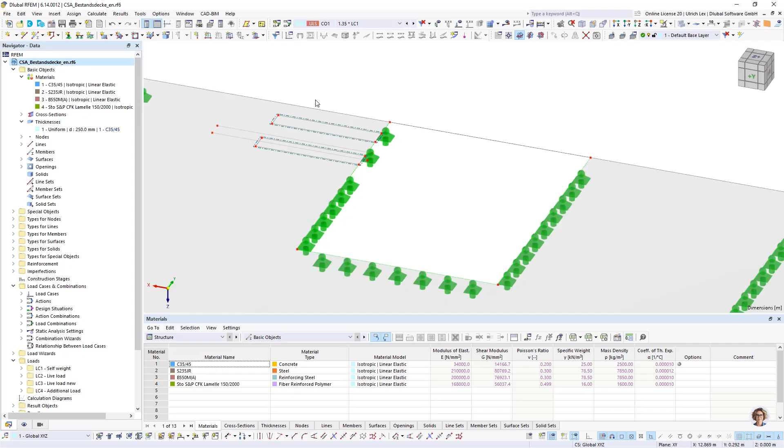Why did I do this? It's because in the second state we want to have an opening here, so I can take off this surface. But at the beginning, I have to create an opening and fill it with a separate surface, and the same here in the front.

The same is true with the supports. In the first state it's point supported with nodal supports, and in the second state there will be a line support here, like a wall or something else. So that means for the beginning we have to model both in one system, and later on we will decide which support is acting in which state.

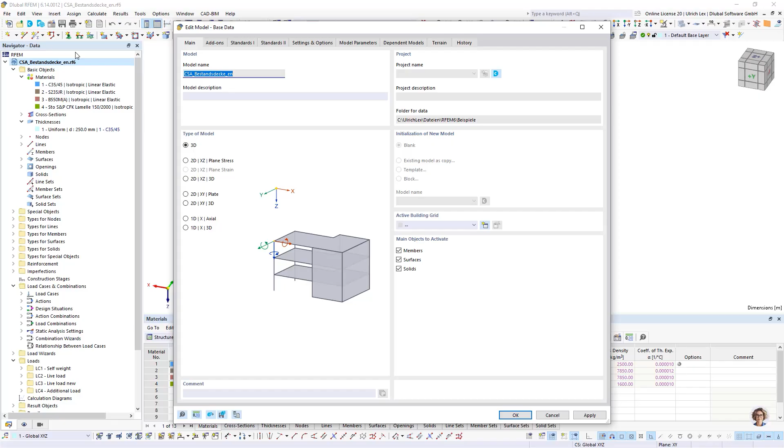Okay, the second thing is the loading. I created some load cases already. What I forgot is, at the beginning I want to take a look at the base data. For today's job we have activated different add-ons. The most important is the construction stage analysis add-on, and additionally I created the concrete design, the steel design, and the stress-strain analysis as well.

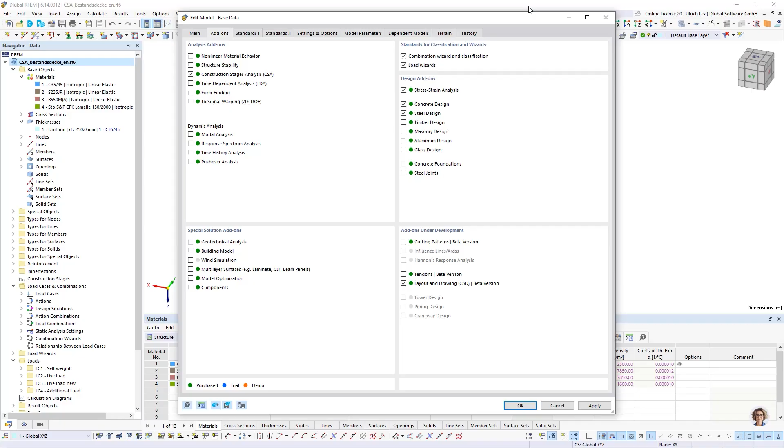For the additional tabs I did not change anything, so the settings are by default. Okay, so then we can continue with the system. There is a loading that is created. I created some load cases: at the first stage, the self-weight.

Here it's up to you how many load cases you create. In my case, the self-weight will be the same in the first stage and the second stage, so it's enough to have one load case. If the load is different between the different stages, then it would be necessary to have more than one load case, also for the self-weight.

I did this for the live load. I have one load case for the old live load, and an additional load case for the new live load for the new stage, and I created an additional load case for additional loads.

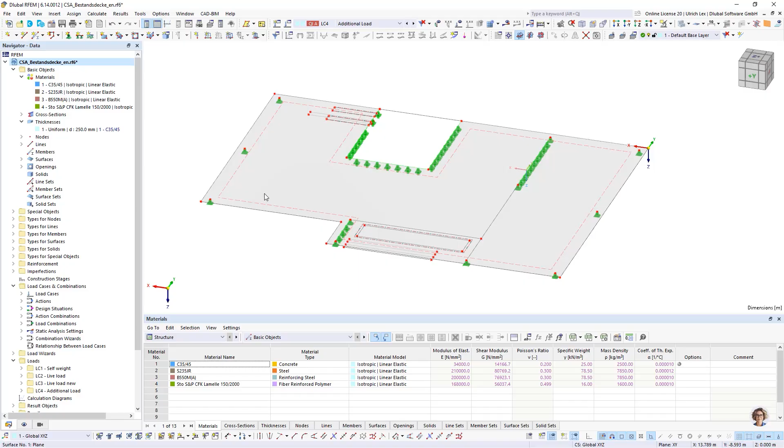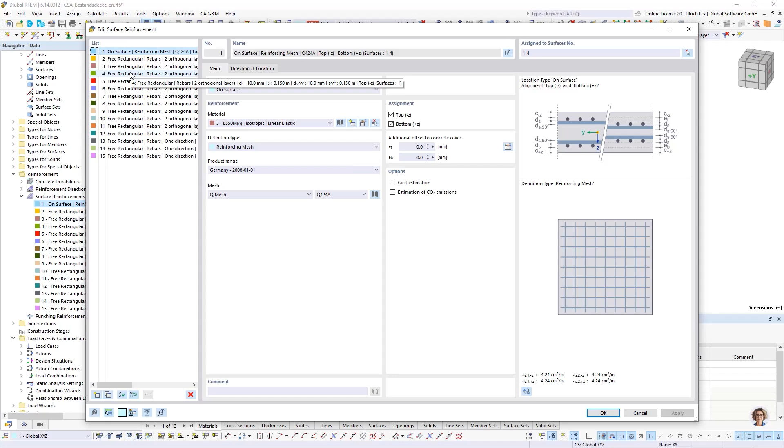Okay, what I did additionally is, in my case, I know the existing reinforcement for the slab. So that's why I wrote this info directly in the program. I created here the surface reinforcement, maybe as a basic reinforcement. It's a mesh Q424, maybe on top and bottom side, and additionally some free reinforcement in the other places. We can also show this reinforcement when we check on the part.

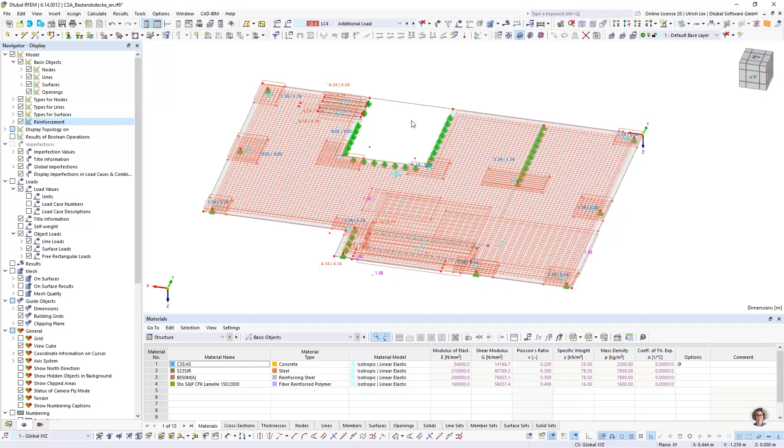This is a thing we don't know for every existing system, but it's not so important. When you know this reinforcement, it's easier, because then you can do the check between the existing and the needed reinforcement. When you do not know it, you have to go one step back and compare the stresses, and decide with the stresses if your reinforcement is okay, is enough or not.

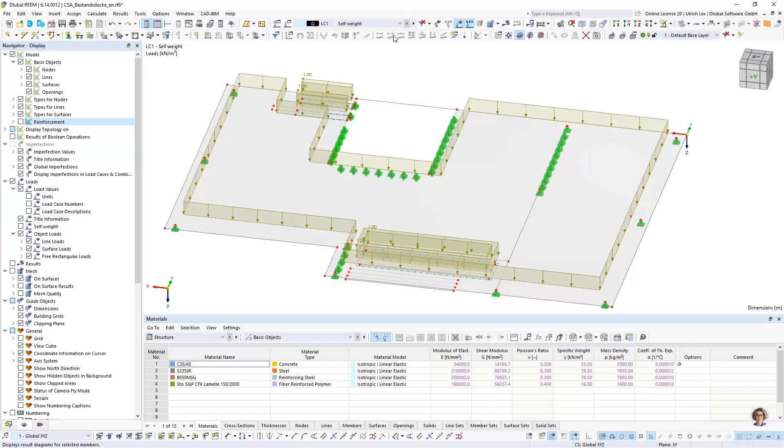Okay, then we can continue with the loads. As I said, we want to change the system in stage 2. We then want to open these openings, and we had a different load. When we take a look at the loads, we have self weight only — these are only example loads, not anything from any code. We have a live load defined with 5 kilonewton per square meter in the old state and the same in the new state, and additionally loads here in the front in the new state.

Okay, then we can continue with defining the different stages. When the add-on is checked on, we have here in the data navigator the option to create a new construction stage. When I do this, I get this new tab. Here I can choose which members, surfaces, solids are acting in our new construction stage.

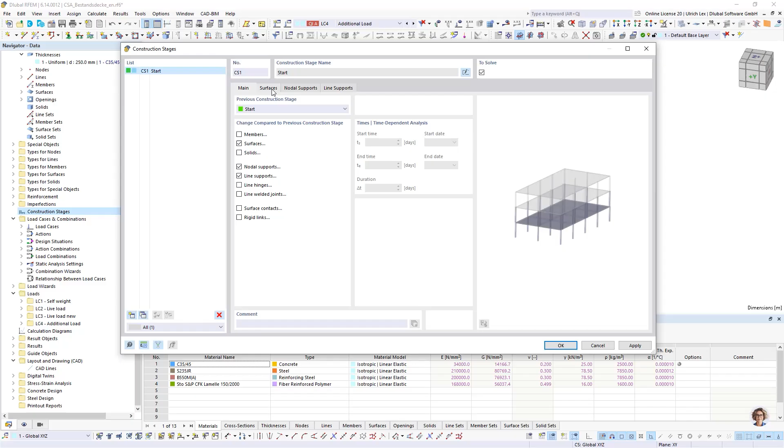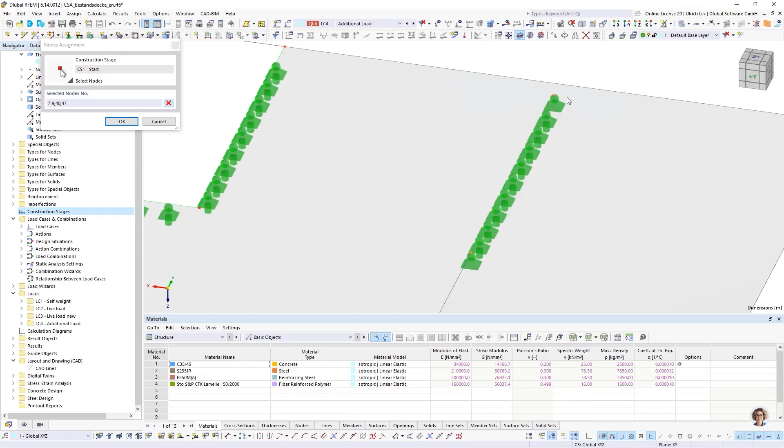So I activate surfaces because we have no members, and I activate nodal supports and line supports. Here I can choose the different surfaces that should be acting in the first stage, and also the nodal supports — I select these because both should be acting in the first stage — and also the line supports.

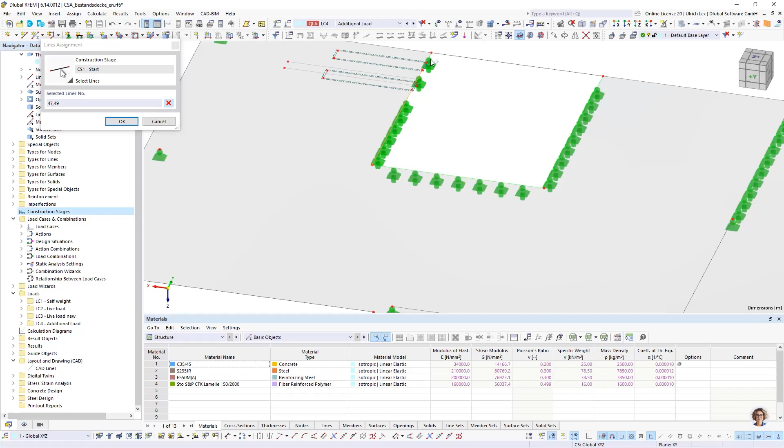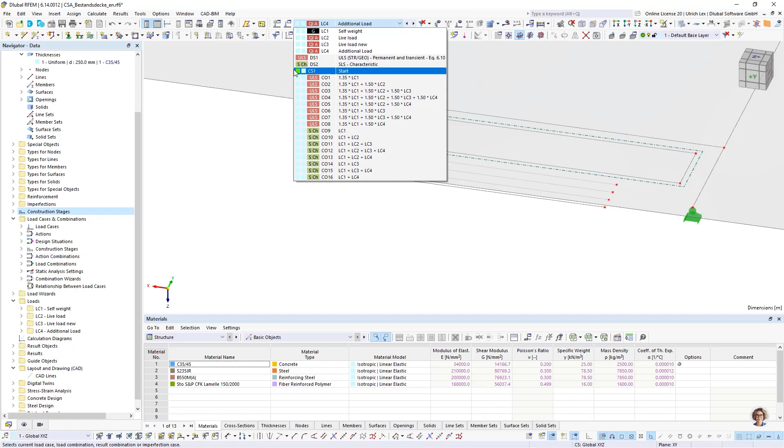Okay, continue with OK. Then we can check it when we go to the load cases and combinations. Here we get one item, construction stage 1. If you choose this, you see all the system as you have defined it. Here we see now only the nodal supports because they are acting at construction stage 1.

So for my second situation, where I want to deactivate the surfaces, I want to create new members as support, and add a member on this line and here, and check afterwards if these members are enough as additional supports in stage 2.

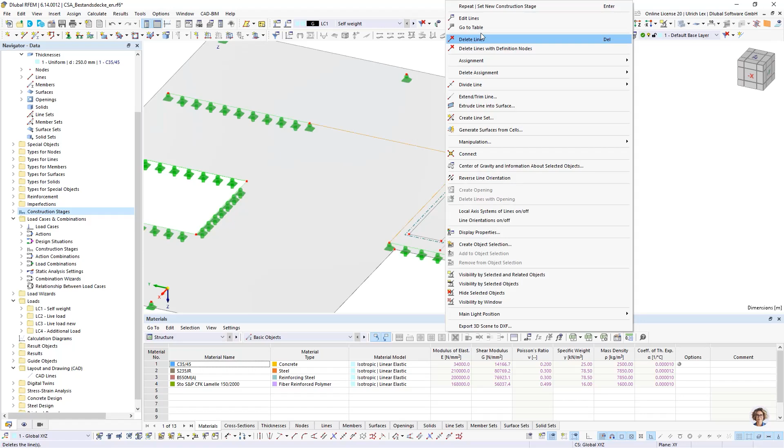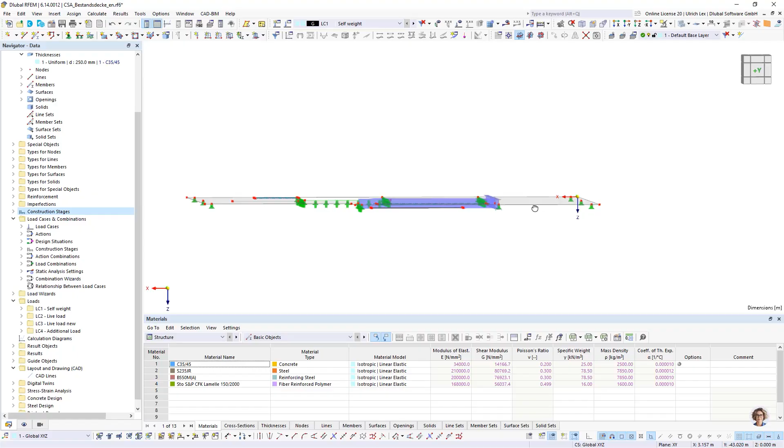So then I can start with the modeling. I choose my lines and edit these lines. I add a member here, choose a cross section, maybe an IPE. Okay, so now it's in the center line. I can change this when I add some eccentricities.

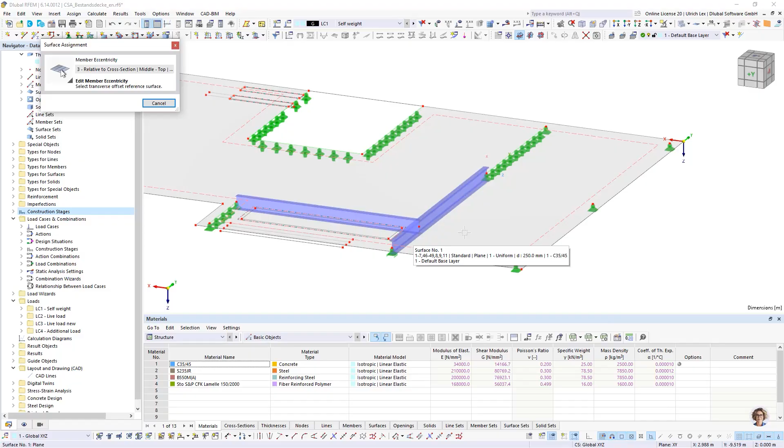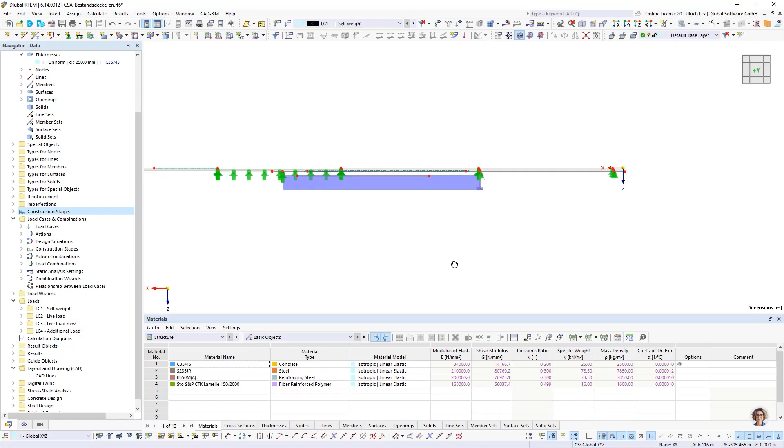It should be acting on the top, transverse to the surface, and this should be on the bottom side, acting on member start and member end. Then it's located on the bottom side of the surface.

So one special thing is, when I create my members in this way, each FE node is connected from the member and from the surface, so we would have big normal forces in the system. When I don't want this, when I want my steel member sliding between the concrete slab and the steel member, then I can add a special object.

It's called line release — I create here a new line release, choose my lines where it should be acting, and create a new line release type. So I only have a small spring constant in the x-axis, and the other forces are fully transferred. I want to release my newly created members, this one and this one, and confirm with OK.

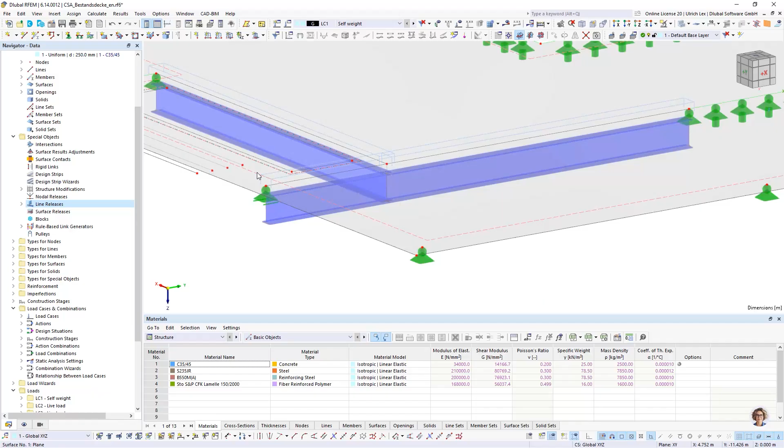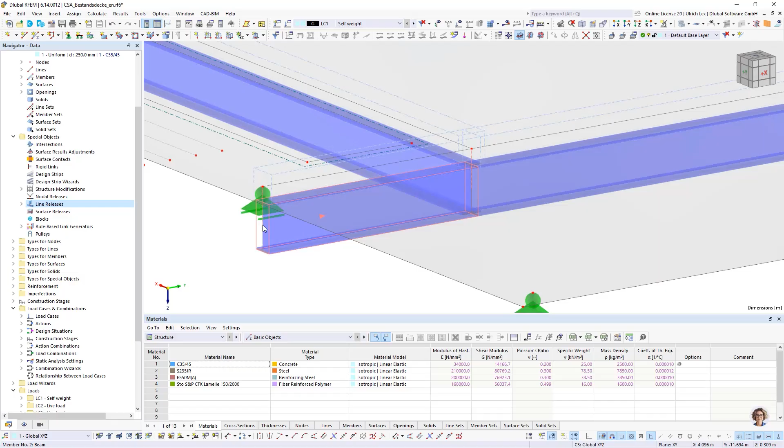So now it's the case that the line release creates new nodes. My surface node is acting as node 41, and the member node is acting as 76. Here I need to be careful, because if I want the support to act in stage 2 on the member node, I have to create an additional nodal support and choose the new node created from the line release.

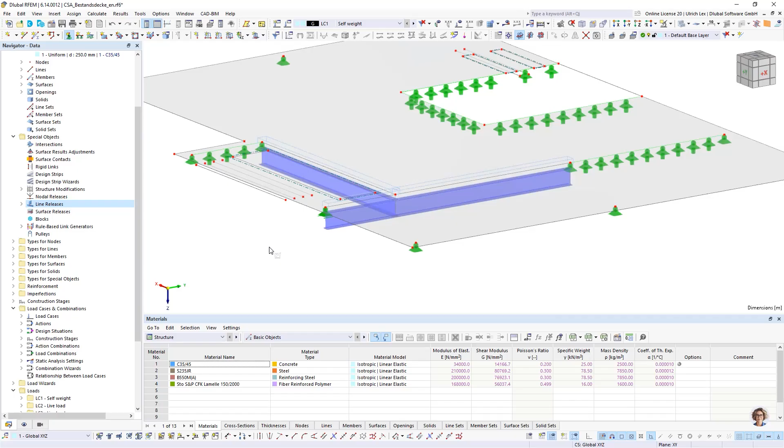So this is all for the moment. Then we can continue with the creation of the stages.

Now I want to create my stage 2. I can create here a new stage. When I do this, I have the option to create a completely new stage where I do not consider any previous stage. I can change here from start, or I can use here a previous stage.

That means the deformations and so on, and the self weight, are transferred from the first stage to the second stage. And also the activated things, surfaces, nodal supports are transferred from stage 1 to stage 2.

In stage 2, I can modify it. I can modify the system in this way. Now here additional members should be acting.

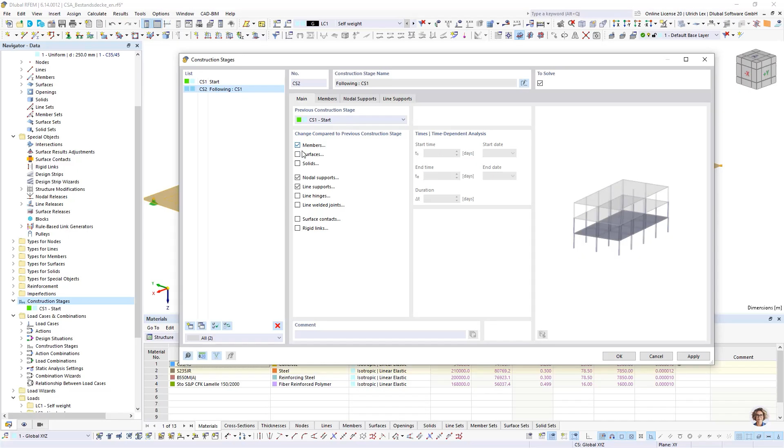I can choose it, 1, 2, 3. Then my surfaces are active 1 till 4. But here I want to have only surface number 1. That's why I can deactivate the other surface. That means I create this opening in stage 2.

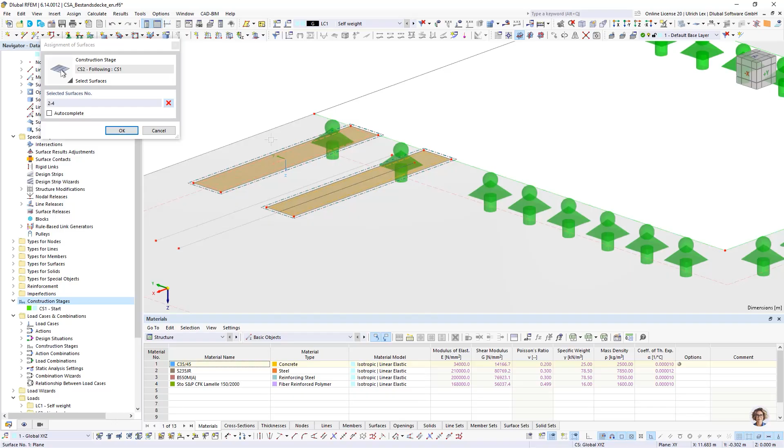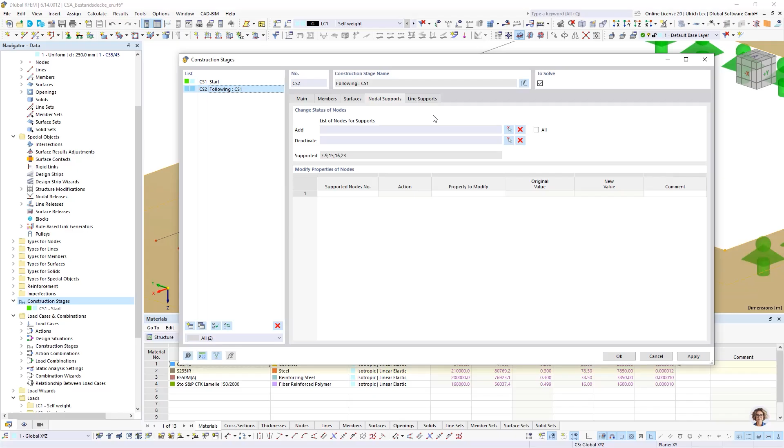I can take a look at the nodal supports. Here nodal support in stage 1, nodal support 41 is acting. And here I can add this nodal support 76.

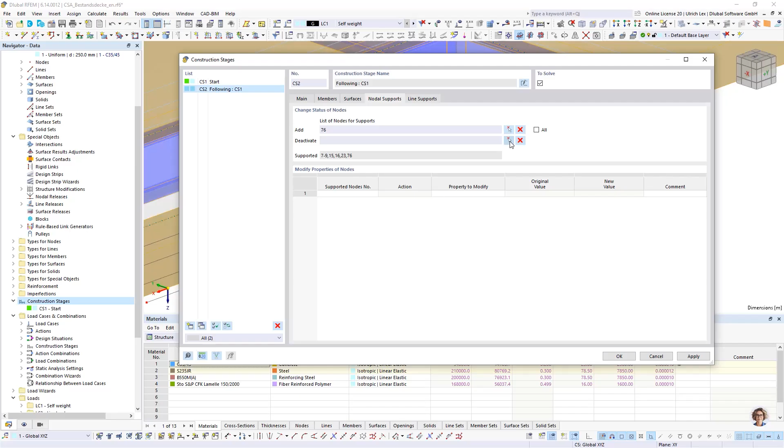And I want to change and deactivate this one and this one, this one and this one, and the 41.

And here I want to add some line supports. I want to add here, because in stage 2 a line support should be acting instead of the nodal supports. And the same here.

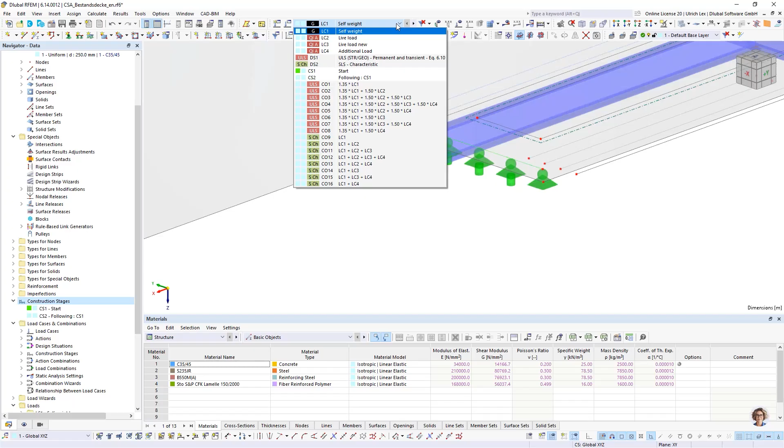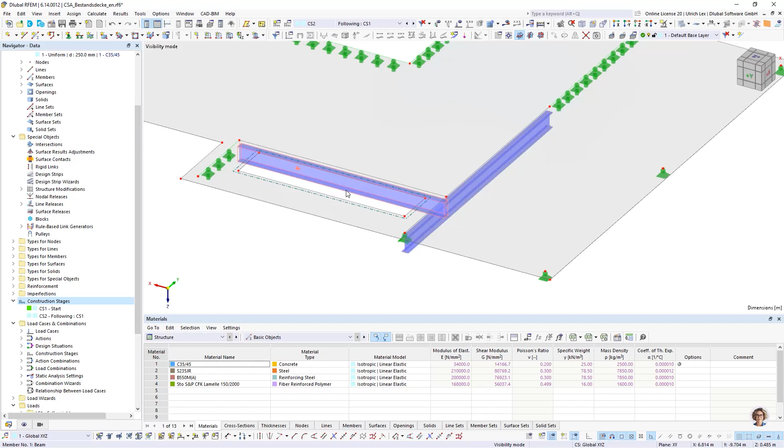So when I continue with OK, I can do the same as before. I can take a look at my stage 1, which I already created before. And in stage 2, I now have my line supports, my steel members, my created openings, and the line support here in the front.

Okay, so when we did this, the different stages are finally created. So the next step we could do is to take a look at the loads.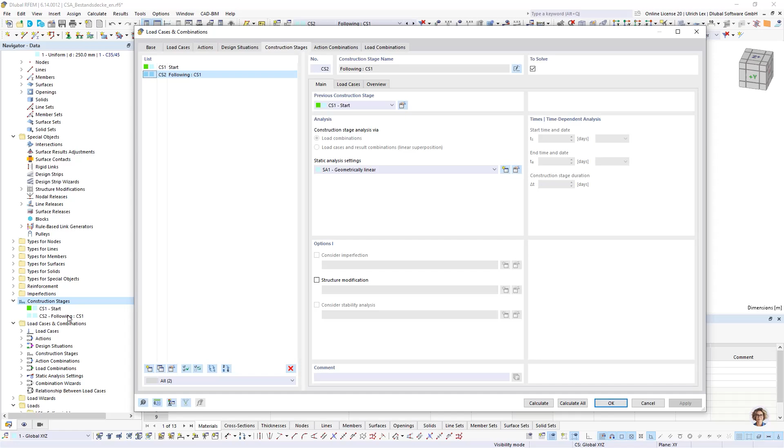Here I can open the load combination and load case dialog. When a construction stage is activated and some stages are created, we have here a new tab, construction stage. Here it's possible to assign different load cases to the different stages. We want to start with stage 1. In stage 1, my self-weight and also the live load in load case 2 are acting.

In stage 2, the self weight should be acting, but not load case 2. Instead, load case 3 and 4 should be acting. And this is all we have to define. We only have to say in which stage which load case should be acting.

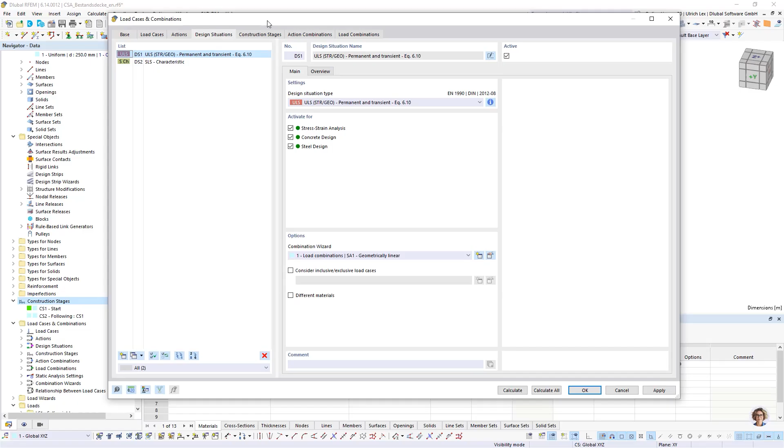So when we continue, we can go to the design situations. Today, for the example, I have only created 2 design situations, one for the ULS and the second for the SLS design. When you want to do all the checks for the different materials, maybe concrete, steel, and so on, you would need more design situations. But today it's more important to show how the construction stage is working, not so much the different checks for the materials. That's why I have only 2.

And now it's possible to assign to these both design situations the different construction stages. Here I can use the combination wizard. When I modify this wizard, I have the option to consider here an initial state.

And here I can choose stage 1. When I do this, we see that the load combinations are created automatically for my design situations, and they are acting in stage 1 only load case 1 and load case 2.

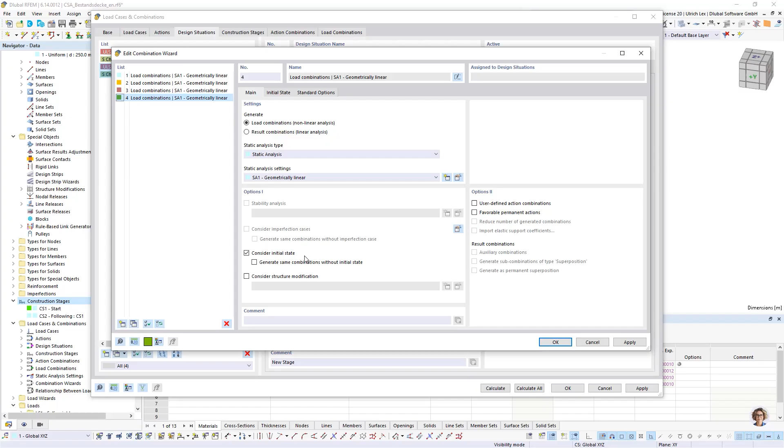I can also say new stage, and here I can say old stage, and now I can modify my wizard. When I copy this again and say my initial state should not be stage 1, it should be stage 2 in this case.

Continue with OK. Assign this wizard to design situation 1 and 2. Then we see that additional combinations are created. The same we had before for stage 1 is now acting for stage 2, and we see here only load case 1 and 3 and 4 are acting.

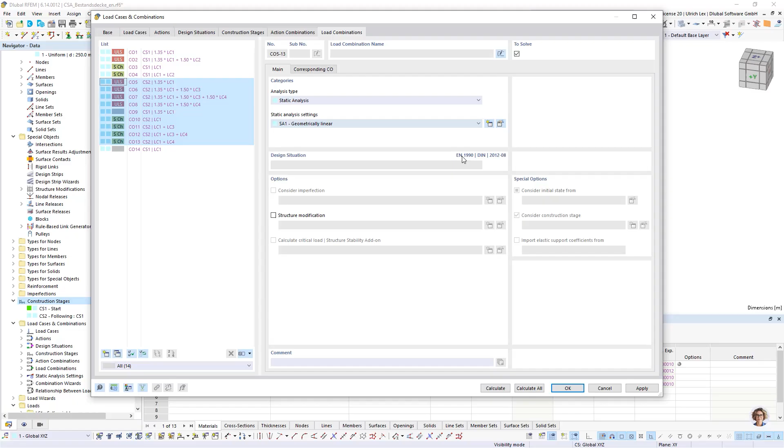So this is the way you can create different combinations for the different stages. When we continue here with OK, my different combinations are created. You can also now check these combinations graphically.

It's so when a stage is considered, then also the objects, the activated objects are displayed. When I switch to combination 2, I see that my nodal supports are acting. And for combination 7, the line support and the members are acting.

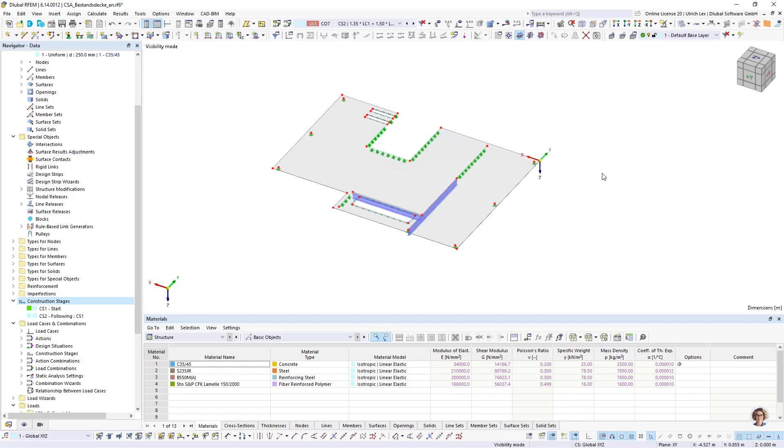So as the last part, we can check the FE mesh. Maybe it's the length of 0.25, it's okay for this case. And then now we can continue with the calculation. Here I can choose calculate all and try to run my first try.

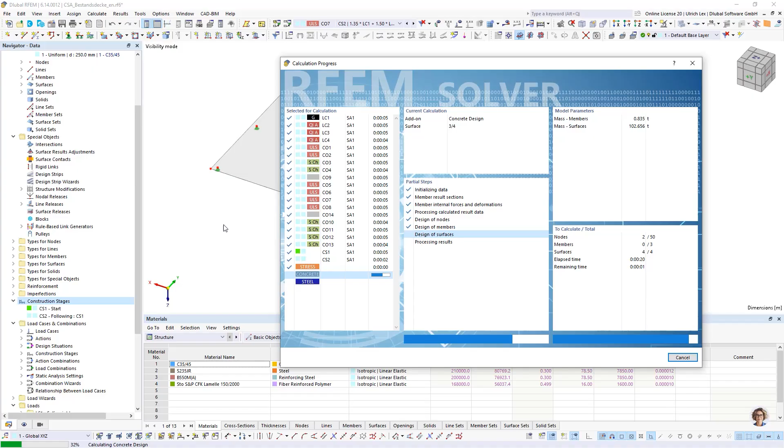As results, we will see that we get 2 result types. On one side the static analyze results, and on the other side the results for the different add-ons. You can choose here one time the static analyze results, and on the other side the results of the different add-ons.

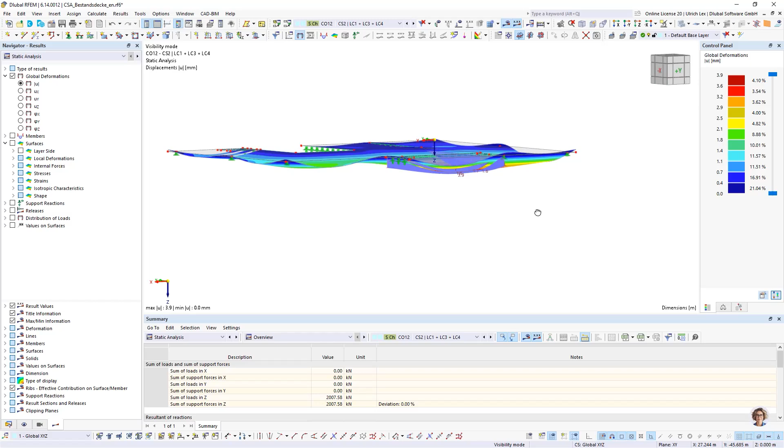When we take a look on the results on the different stages, I can choose here maybe for deformations. In stage 1, we see that the surfaces in the openings are acting. And when I look at stage 2, then also the members are acting. So our input was okay, I would say.

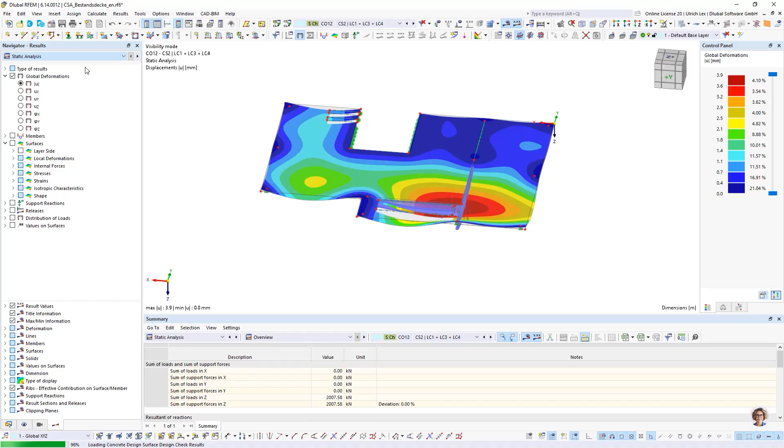For my case, where I defined my reinforcement before, I can check now directly the results of the concrete calculation. Here I can decide which results I want to see. By default is checked the maximum of all selected design situations. Here I can deselect these design situations, and I want to take a look only at stage 1, the old stage.

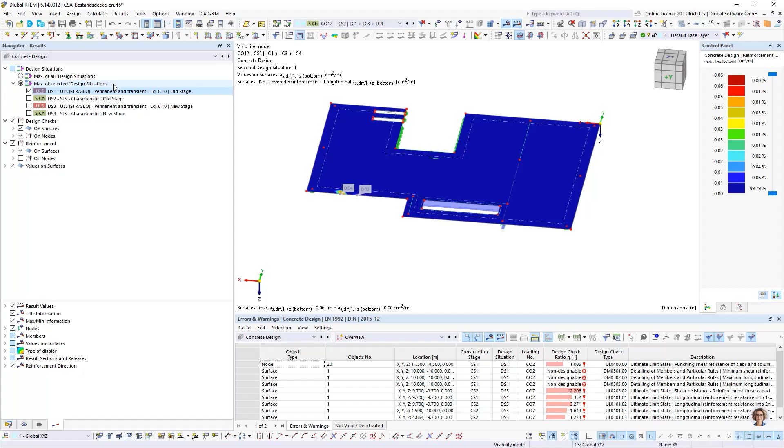For the old stage, when we take a look on the reinforcement on surfaces, and here maybe the not covered reinforcement, we see that for the old stage, the reinforcement is okay. Only small things, but I think it's okay. Here you could use some surface result adjustments to smooth these small things, but it's okay. It's a singularity.

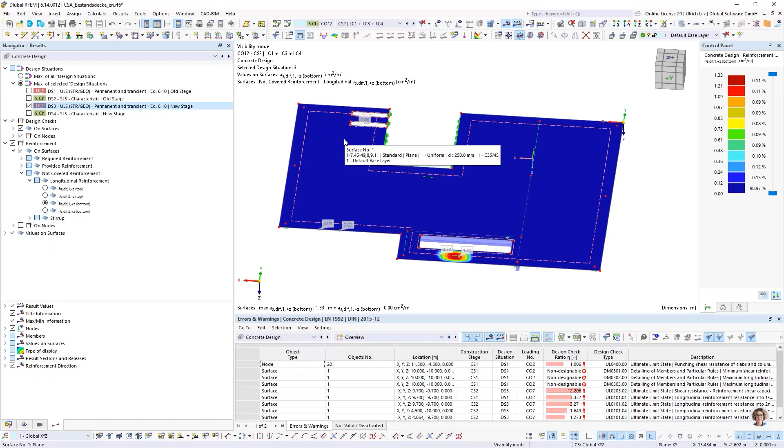Now we can easily check if the reinforcement is also okay in the new stage. When I do this, we see that only here in this part it is not okay, that the reinforcement is not high enough. So when we do not know the exact reinforcement in the existing surface, then we have to check the static analyze results.

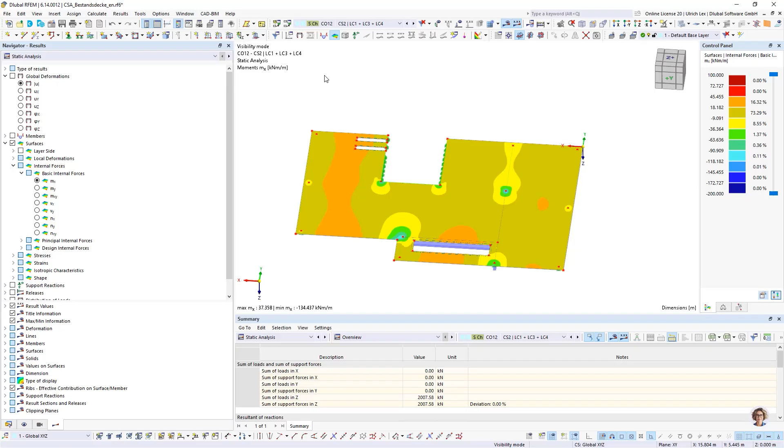Maybe you can use here the internal forces. You can check here, or compare the different internal forces. It is not possible to overlay two results, so you have to compare it visually. Maybe this is possible when you create here a new window and say you want to see both together.

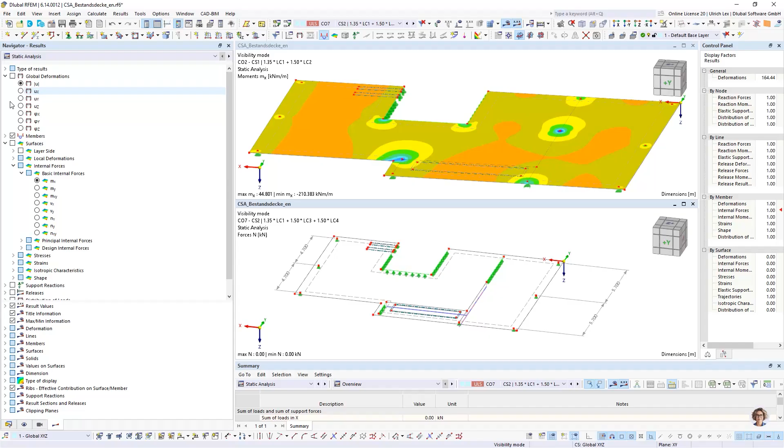Then you can on one side activate the results for maybe stage 2, and in the other case the results for stage - on one side the stage 1 and the other side the stage 2.

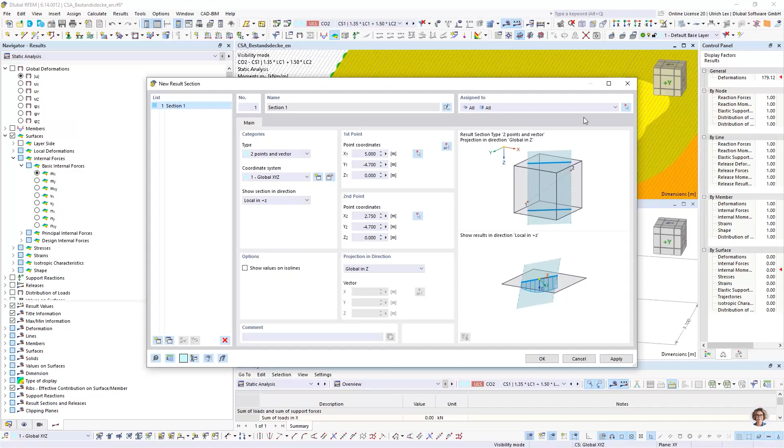Here you can use also maybe the result sections, when you create here maybe for this node a result section. Then we see here's the difference, the different values, for the different stages.

These pictures or these results you can then easily print to the printout report, and in this way compare the different stages. It's more easy when you know the exact reinforcement.

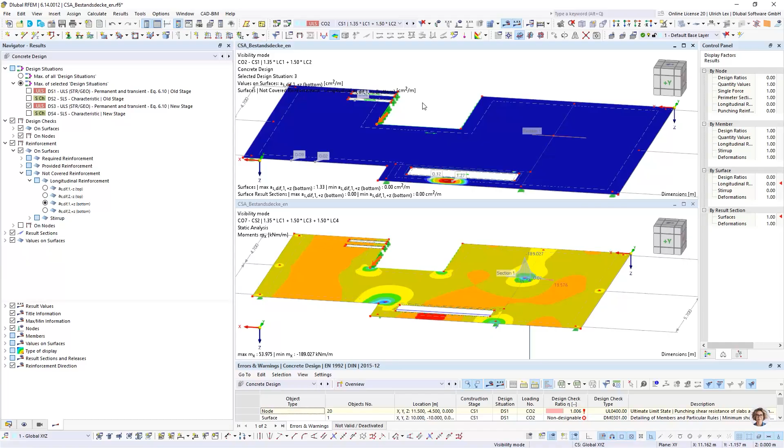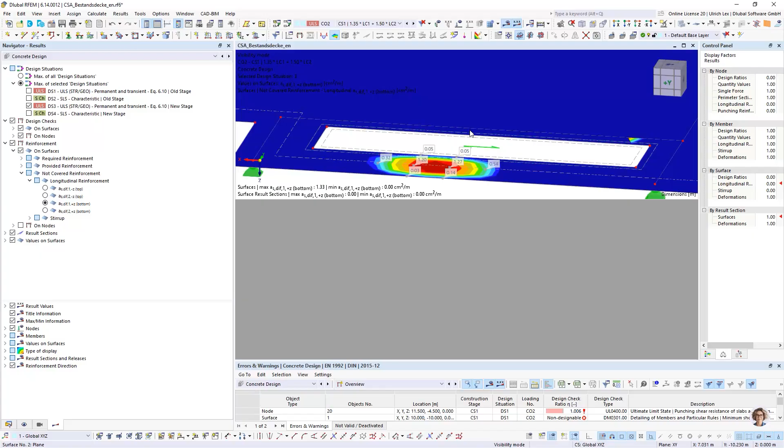Then you can say, okay, with the not covered reinforcement, you can compare it. So as we see here, the reinforcement is not enough. So we have to add some things. Maybe we could add here an additional steel member or something else.

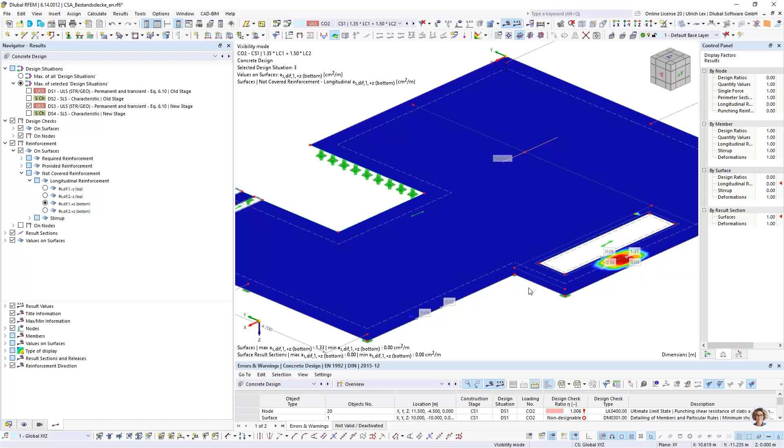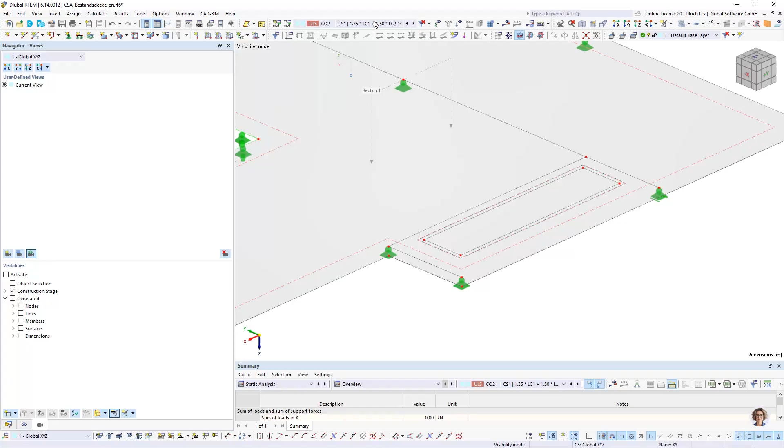I prepared here something new, and we can add here an additional beam as well. Therefore, I created here some lines. So these lines are not exactly in the surface.

They are downside of the surface. For these lines, I can choose one line and edit this line, and want to add here a new member. This new member is called rebar, and this rebar member can assign to this surface.

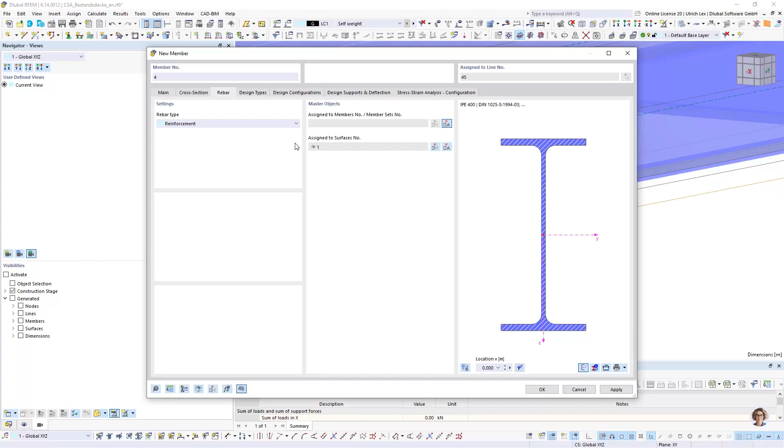So for this rebar, I have to activate here a master surface or a master object, and I have to choose some cross section. So I choose here something like a bonded reinforcement. We have it in our material database. It's called CFK.

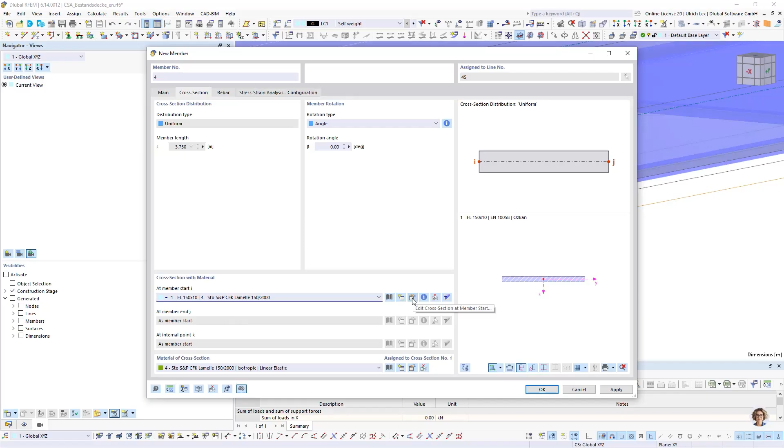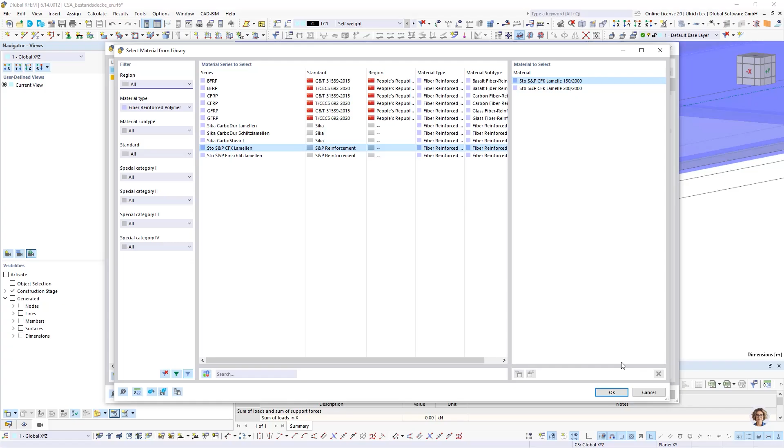From different producers. We have it in the database under fiber reinforcement, from different producers, Sika and Sto. And this you can use also in our case.

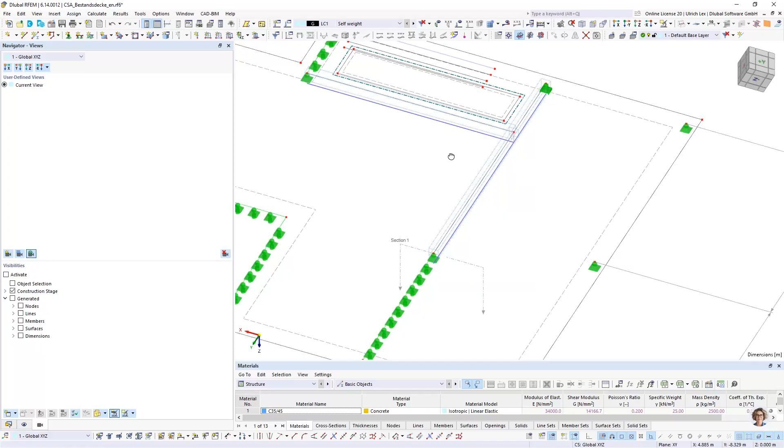Okay, here it is important. I want to add it to all my surfaces, to all my created lines. So here, one member cross section is okay, and my master object is this. Okay.

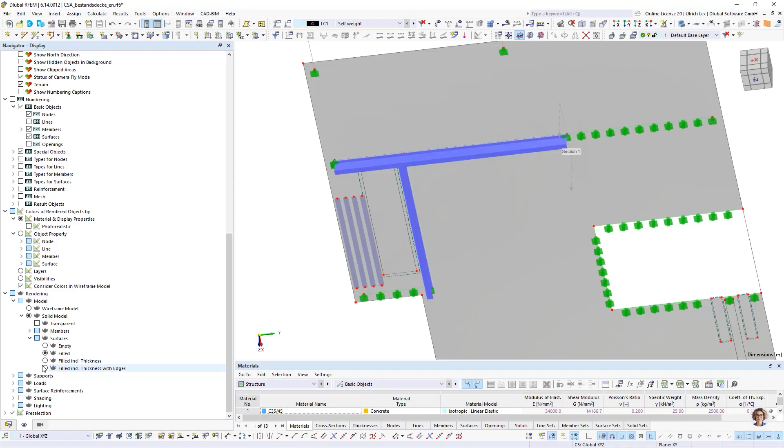Okay, and the last one is this one. For this type of rebar, it is important that the section of the rebar and the section of the surface is connected. That means when we take a look on the surface, I want to activate some clipping plane.

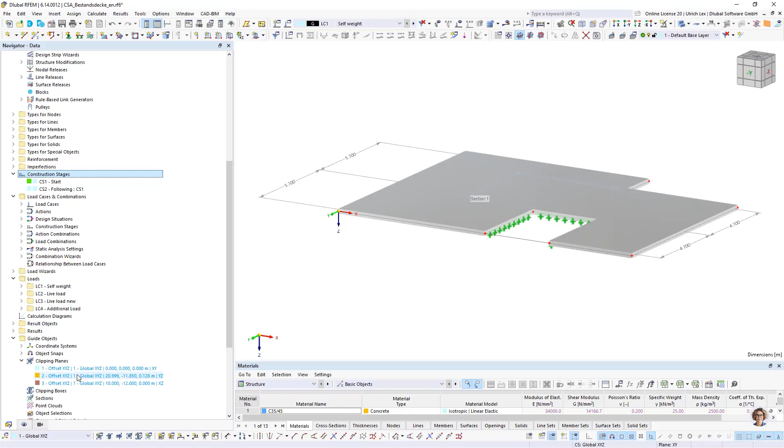Here is this one. So I can take a look at my... So it is important that the cross section of the surface and the cross section of my rebar are connected. I cannot assign this master object when here is a gap in between, but I can assign it when this rebar is inside the surface, or at least when its boundary is connected together.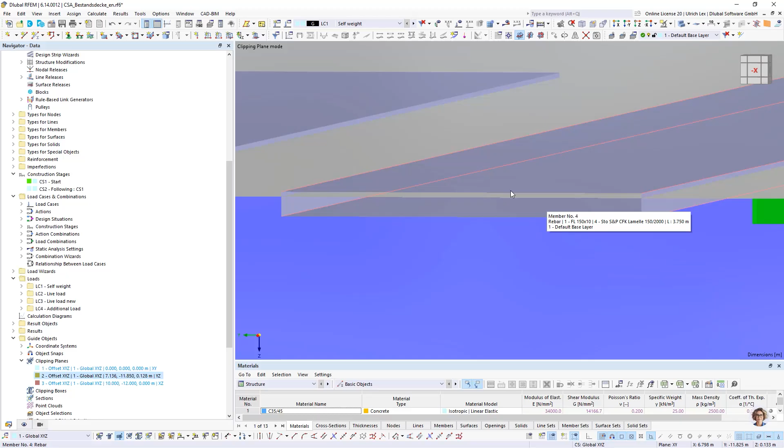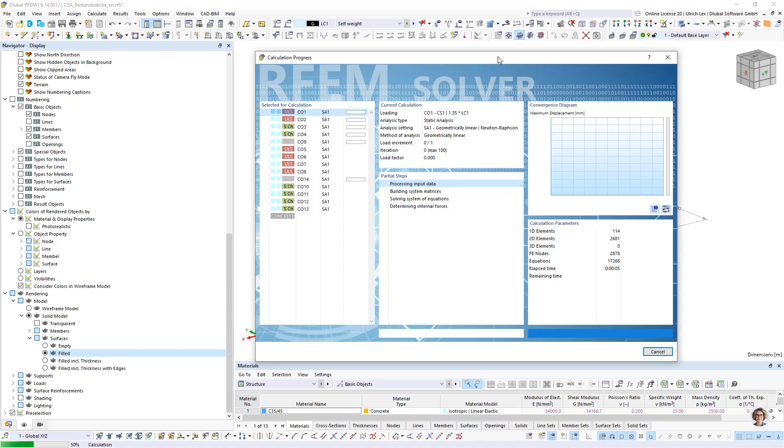So what is happening now? When I add this rebar, then we can take off, and here it's filled. Okay, then we can compute again. Here's a concrete design. And we can take a look if there is something changed.

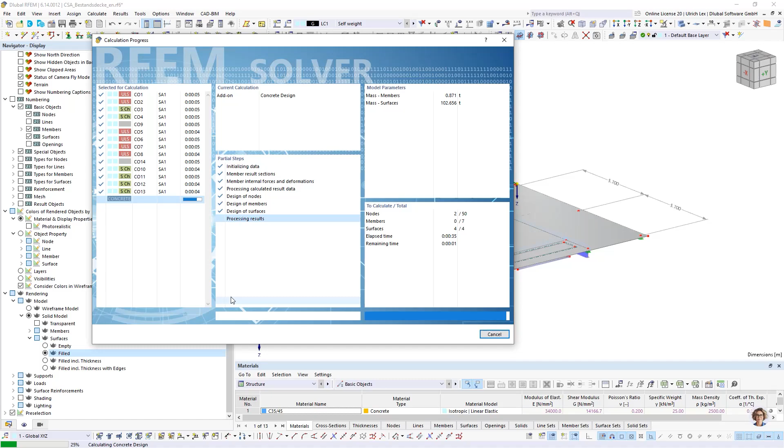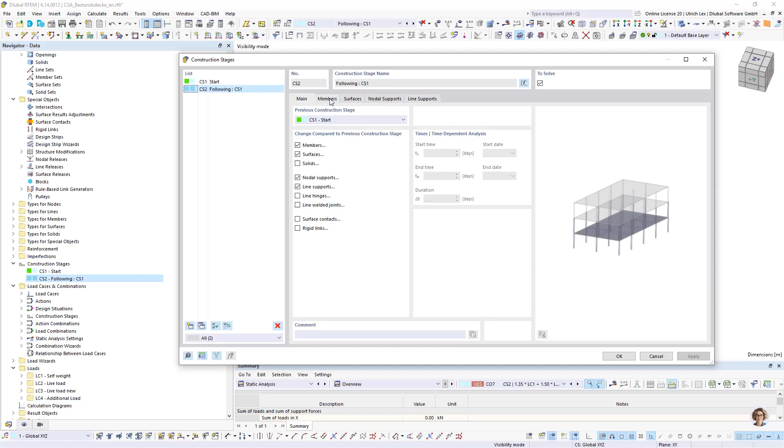So when we take a look on the results, then we see that some members, that there is nothing happen, because I forgot to activate my members. So I want to do this afterwards. I have to modify my construction stage, and I have to add here my new created members, my rebar members, and I have to add it in stage 2.

So 1 to 4, okay. And now I can run the calculation again. So it would be better to check it before.

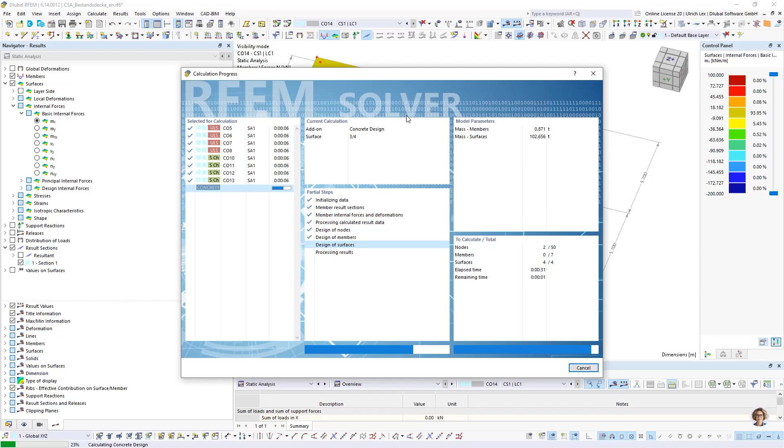And now we see that my not covered reinforcement is nearly enough, or my reinforcement is nearly enough. What has happened? These rebar members get also normal forces, and therefore I need not so much reinforcement, or my existing reinforcement is enough in my concrete slab.

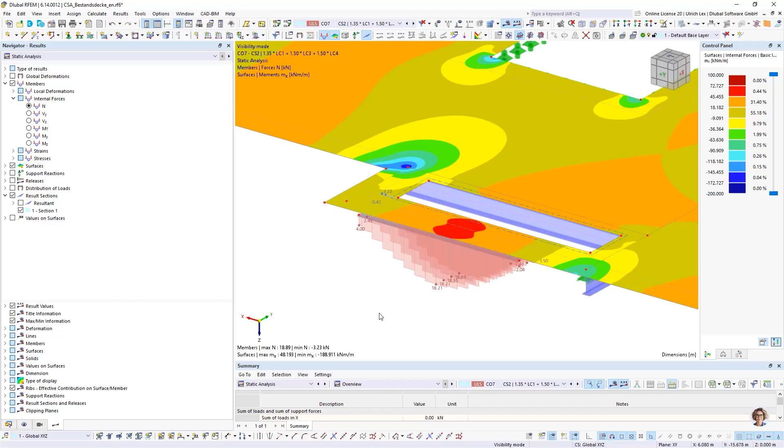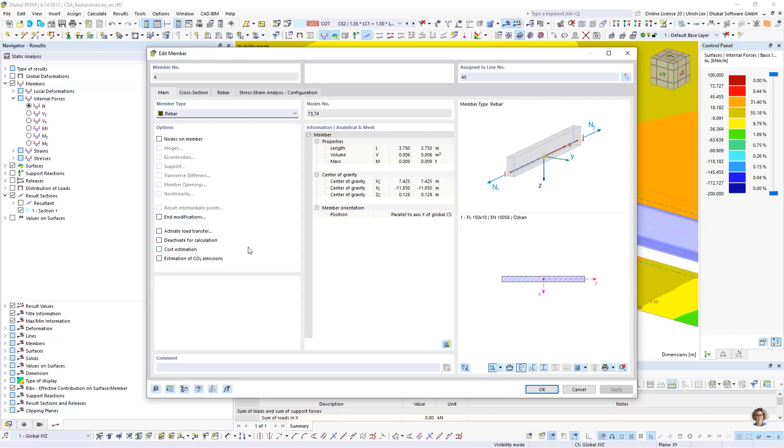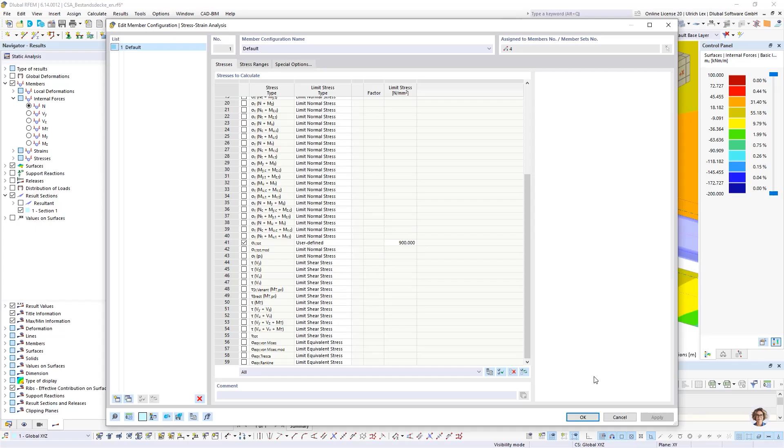So for these rebars, or for this bonded reinforcement, we do not have a special design add-on. The only possibility, maybe the producers have some tools, or the only possibility is that we can do a stress-strain analysis. You can here add a stress-strain analysis, maybe, and choose the sigma in X direction to check it to a limit stress, and run here in this way and design. But it's only a stress strain. Maybe you need some additional checks for it.

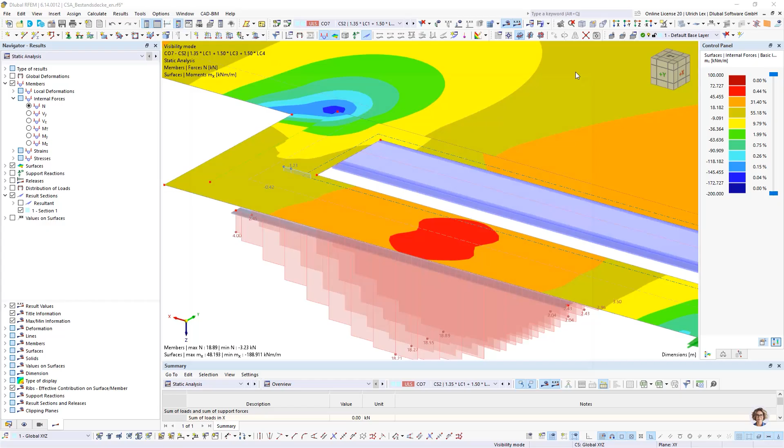Okay, the results itself for the construction stage. I want to take a look, maybe we want to run the steel design. Here you get also the different results when you do a design. You get the results for the different stages. In this case, stage 2. When we take a look on the concrete design, we have also the results for stage 1 and stage 2.

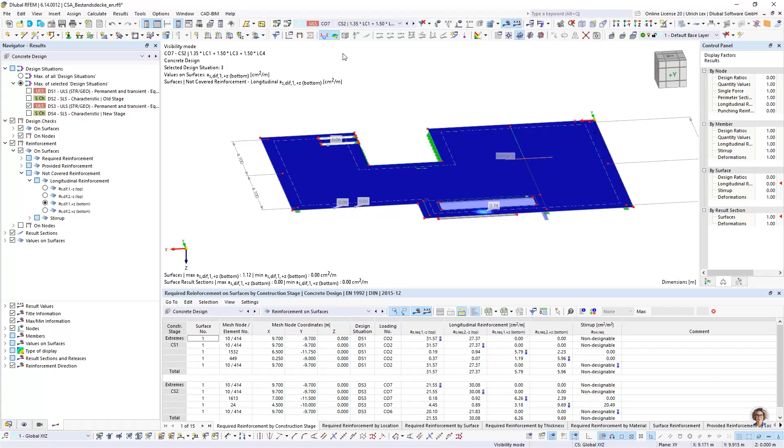These are the same in the printout report. And the most important thing is to document the different results, or the differences between the different stages, to document it graphically in the report. As I showed, you can easily create a second window and compare in this way the different stages.

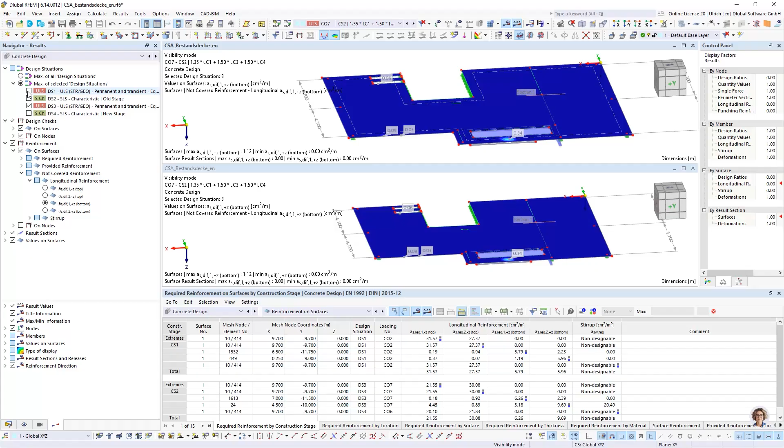So in this way, this is all from my side. I want to say thank you for listening. Hopefully it was new information for you. And in this way, I want to say thank you and give back to Andreas.